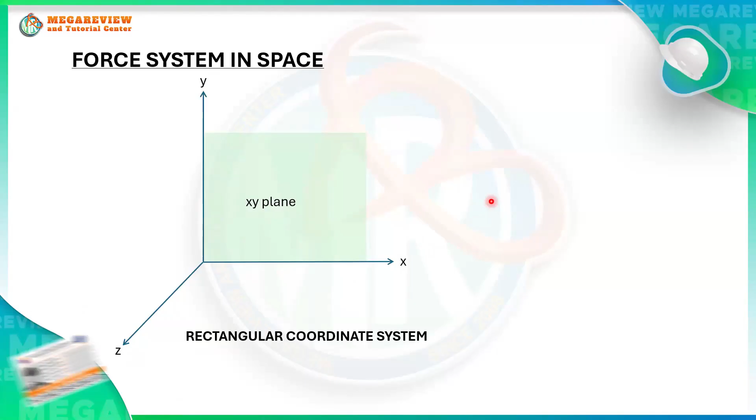Now, these coordinate axes form coordinate planes. The green plane, that's your xy plane. This one in blue, that's our xz plane. And this one, that's our yz plane. So these are the coordinate planes.

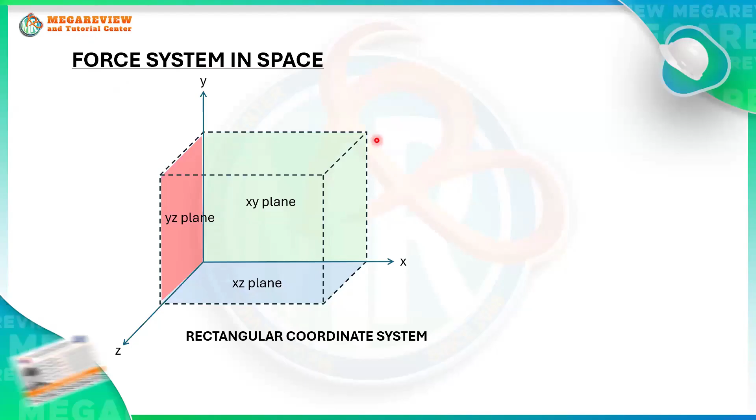So to get the x component, what we'll do is simply use ratio and proportion. So your x component is to F as x distance is to the inclined distance d. From this equation, we can get the x component of our force.

If we get the y component, it's still ratio and proportion. The ratio of y to the total force equals the ratio of y distance to the total distance or inclined distance. That's why your Fy is equal to y over d times F.

Now you may see the pattern here. If this is x, what's in the numerator is the x distance. If it's y, what's in the numerator is the y distance.

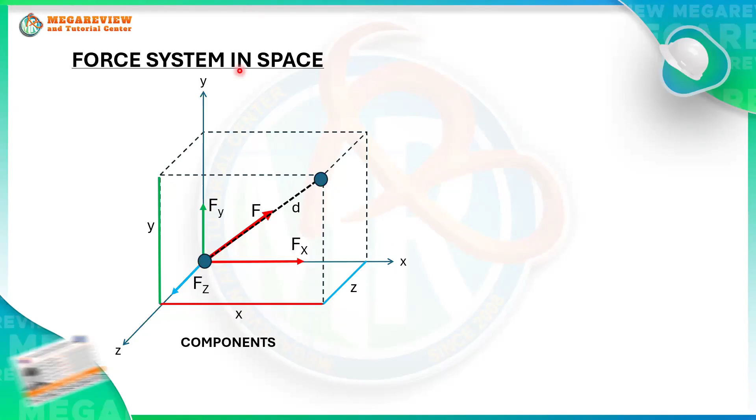Okay, itong d na to, pwede mong isipin na parang space diagonal lang siya ng ating prism. Di ba? Space diagonal lang siya ng prism na to. And to get this, paano ba kayo kumukuha ng space diagonal ng rectangular prism or let's say cube? Di ba equal lang yan to square root of three times the length ng side? Or kung dito, ilalagay natin yung x, y, and z, your d here is equal lang to square root of x squared plus y squared plus z squared. Galing lang din ito sa Pythagorean theorem. Okay, so that's how you get your d distance. Kailangan mo lang yung x, y, at saka z.

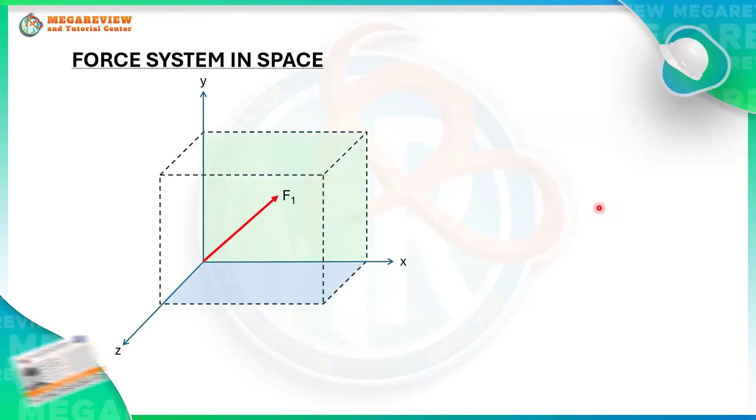Okay, ngayon, paano guys kapag hindi lang isang force ang nag-act sa isang body or rigid body. Let's say may F1 ka, F2 at saka F3. So from your previous discussion sa statics, sa 2D, kapag may mga series or may mga forces na nag-act on a certain body, you can express this in terms of equivalent single force, di ba? And that equivalent single force is your resultant. And how can we get this resultant? Well, basically, resultant is equal lang to the sum of the forces. And this resultant is also a vector quantity.

So that's why meron din itong components, at saka magnitude and direction. So if you want to get the x component of the resultant, we will simply sum up the x component of the forces. Yung y component naman ng resultant equal lang to the sum of the y component ng forces. And yung z component naman natin equal lang to the sum of the z component ng ating mga forces. Okay, so that's how you get your resultant, kung ang force natin is concurrent. Or kahit non-concurrent, ganito pa rin naman ang gagawin natin. O ngayon, paano guys kapag halimbawa nag-zero yung ating resultant?

Okay na ba? Ano yan? Naririnig na ako? Naririnig na ako? Thumbs up nga guys if okay na yung audio ko. Hello? Hindi pa rin? Wait, wait. Okay na, okay na. Sige, thank you. Okay, thank you. Sige, balik tayo dito.

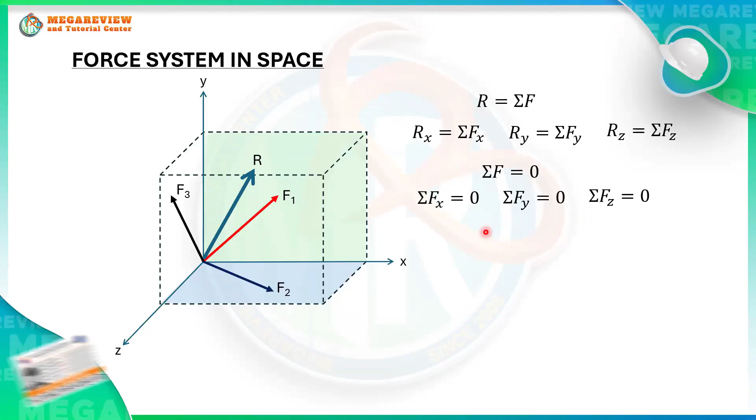Okay. So, when the resultant is equal to zero, ibig sabihin nasa state of equilibrium yung ating particle or yung ating body. So, ang magiging components natin dyan will be zero din. That's why, if kukunin natin yung summation of forces along X, along Y, and along Z, equal din yan to zero. And these equations, yan na guys yung ating equations for equilibrium ng concurrent force system. So, simple lang naman ang concept dito sa 3D. Importante lang dito, alam nyo paano kumuha ng components ng force at saka alam mo paano mag-sum up ng forces and also mag-sum up ng moments.

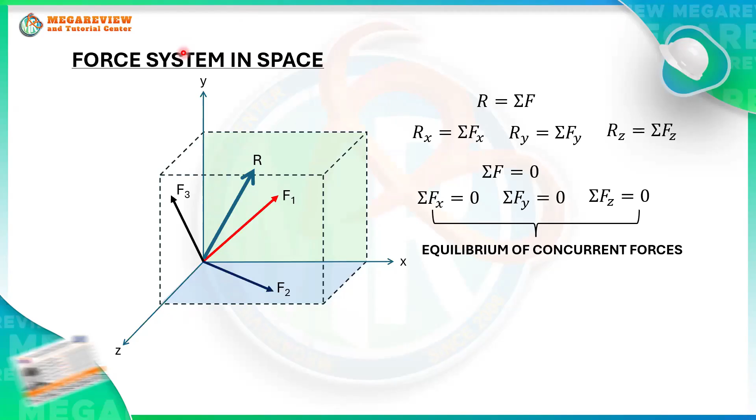Okay, so I think with that, pwede na tayo guys mag-proceed dun sa ating mga problems. Okay, so sige, wait lang. I will just transfer the screen sa tablet. So, nandito kasi yung mga problem ko. Okay. Sige, yan, okay na. Nakita naman sa screen yung problem, no?

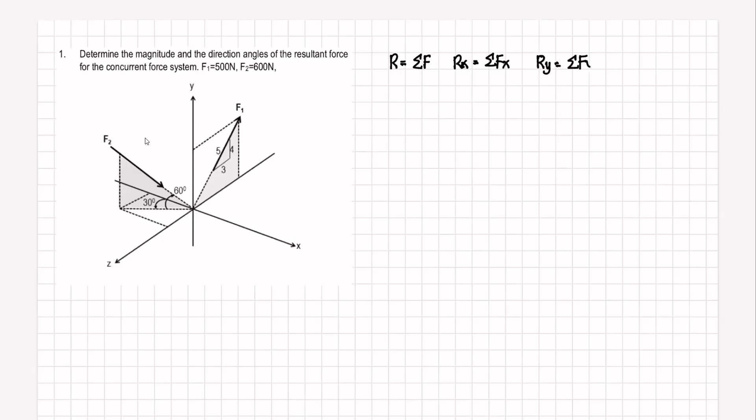Okay, so for our first problem, sabi dito, we have to determine the magnitude and direction of the resultant for the concurrent force system. So we are given here F1 equals to 500 newtons and F2 equals to 600 newtons. Okay, so to get the resultant, this is equal lang to summation of forces, and kung gusto natin makuha yung components ng resultant, kailangan lang natin i-sum up yung component din ng mga forces. So for Rx, equal lang ito to summation of forces along X. For Ry naman, this is summation of forces along Y, and meron din tayong Rz equal lang to summation of forces along Z.

Now, para di tayo mahirapan mag-imagine sa mga forces na nakalagay sa space or sa 3 dimension, i-project na lang natin ito to 2D. Okay, isa-isa nating kunin yung components ng mga force na to. Okay, for our F1, kung titingnan natin yung location ng ating F1, actually nasa coordinate plane ito. Ang F1 natin actually located siya dito sa XY, hindi pala sa XY plane. Nandito siya sa YZ plane. So this is your Y axis, ito naman yung ating Z axis. So ito guys yung ating F1. Okay, ngayon kung yung F1 natin is nasa YZ plane, anong component ba ang mazizero diyan?

Wala tayong projection ng F1 towards the x-axis. Ang projection natin dyan is nasa Y and Z lang. Sige, i-project natin ito sa YZ plane. Drawing natin dito yung ating Y-axis, tapos ito naman yung ating Z-axis. So this is our F1.

Itong F1 na to may given na slope: 3 along Z, 4 along Y, and 5 ito. So itong F1 na to, pag i-project natin towards this axis, makikita natin itong ating Z component, this is your F1Z. Pag i-project naman natin siya dito sa Y axis, ito naman yung ating F1Y.

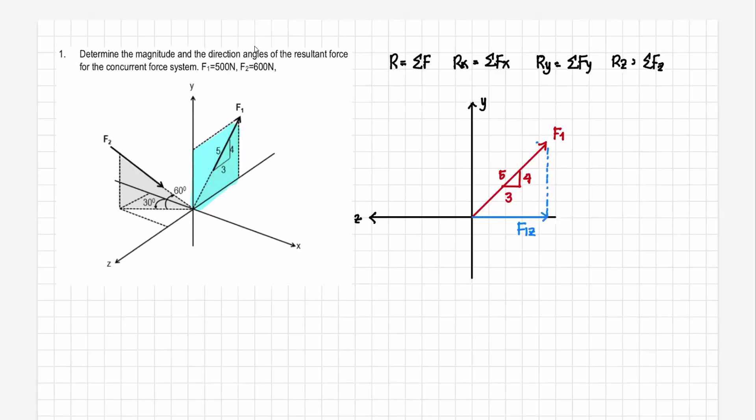Ngayon, kunin natin ang value nito. Para sa F1Y, pwede lang tayo dito mag-ratio in proportion. Pwede natin sabihin this is equal to 4/5 of F1, gamit yung slope na to. Knowing na yung F1 natin, this is equal to 500 newtons. So what is the value ng F1y? Your F1y, this is equal to 400 newtons, di ba?

Ngayon, punta naman tayo sa F1z. Para makuha natin ang value ng F1z, ang distance natin along Z, we have 3. Along the incline naman, we have 5. So pwede natin sabihin, your F1z is equal to 3/5 times your F1. Palitan mo na lang ito by 500 newtons. Your F1z naman is equal to 300 newtons.

Alright, ngayon, since meron na tayo ditong value ng F1z, pwede na natin isulat yung F1 in vector form. So let's say this is your F1. Ang ating X component dito, this is 0. Yung Y component naman natin, we have 400 newtons. Tapos yung F1z naman natin, we have 300 newtons.

By the way, may sign din dapat ang component natin. Kapag ang ating force is nag-act towards the positive x-axis, positive ang ating component. Kung nag-act naman towards the positive y, positive naman yung ating component. Kung titingnan nyo dito, ang convention natin, kung saan nakalagay ang letter, andoon yung ating positive axis.

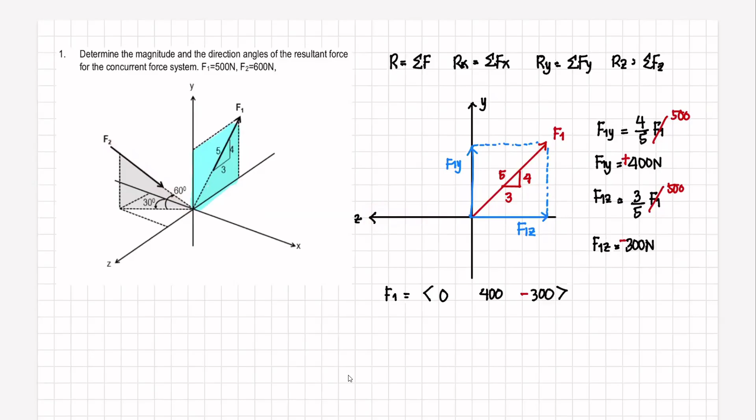Alright, ngayon punta naman tayo sa F2. Ang F2 naman natin, ito naman ang kanyang direksyon. Wala siya sa coordinate planes. Baka isipin nyo nasa YZ plane, hindi sa YZ plane yan. Ang YZ plane natin, ito lang na nasa F1. Itong F1 lang. So ang F2 natin, ito siya, ha? At ang plane kung saan siya nag-act, ito yon. Hindi ito coordinate plane.

Ngayon, itong F2 na to, pwede natin siya i-project parallel to Y. Itong projection natin parallel to Y, ito yung ating Y component F2Y, and pwede rin natin siya i-project parallel to this plane. Itong plane naman na to, this is actually your XZ plane. Ito yung x-axis, ito yung z-axis. Itong plane na to, this is actually your XZ plane. Itong red arrow na to, tawagin na lang natin itong F2 or projection ng F2 to the XZ plane.

Ngayon, try natin na i-isolate yung triangle na yan. So this is your F2, ito naman yung ating F2Y, and this is the projection ng F2 to the XZ plane. This angle, given na to, this angle is given as 60 degrees. At from this triangle, we can get this F2Y.

Pwede natin makuha yung F2Y na to. Your F2Y, pwede natin sabihin equal lang ito to. May value ka naman ng F2, ito ang kukunin natin. Kung i-relate mo ito at saka ito, gamit tayo ng sine function. So your F2Y, this is equal to F2 times sine of 60 degrees. May given naman na F2, this one is 600 newtons. Ano ba ang value nito na F2Y? Sige nga, pakibigay ng sagot.

So let's say this is your x-axis, tapos ito naman yung ating z-axis. Parang ang point of view natin dito is nasa taas. Ayan yung x, ito naman yung z. Tapos ang F2XZ natin, ang direction niya, papunta sa positive x, pero papunta sa negative z. Kumbaga dito, ito yung ating F2XZ.

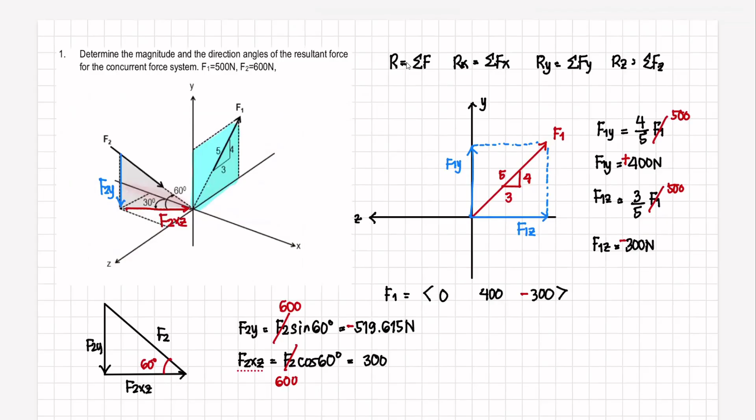Tapos itong angle na to, from the positive x, given na rin to, this is equal naman to 30 degrees. Galing dito, papunta dito, 30 degrees yan. Okay, ngayon pag project natin ito, may kita na natin yung component ng F2. Eto guys, this is now the component ng F2 along x. Tapos pag i-project naman natin dito, eto naman yung component ng ating F2 along z. Okay, and to get these components, gamit na lang tayo ng basic trigonometric function.

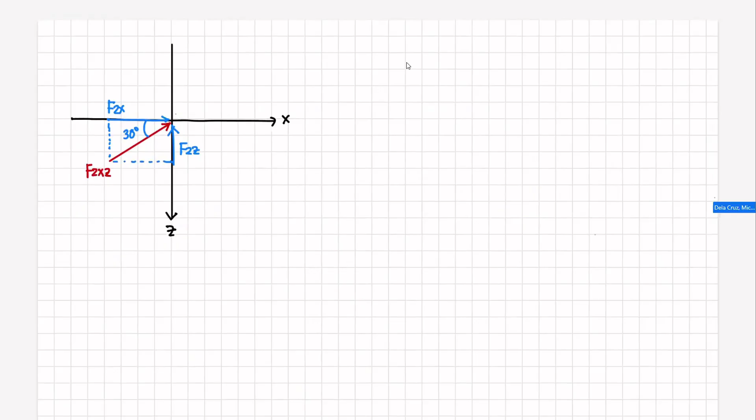Okay, so for our F2x, this is equal lang to F2xz, multiply ka ng cosine of 30 degrees. Okay, this one is 300 newtons. And ano ba ang resulting value natin dito for our F2x? This one is 259.808 newtons. Okay, and ang sign naman natin dito, as you can see, your F2x is directed towards the positive x-axis. Therefore, this is positive 259.808.

Now, for our z component naman ng F2, this is equal lang to the projection ng F2 to the xz plane, then multiply naman tayo, opposite yan dito sa angle na to, kaya gamit tayo ng sine function. So, this is 300 sine of 30. This one is equal naman to 150 newtons.

Okay, and take a look at the direction of F2 along Z. This is our positive Z-axis. Ito naman yung ating Z component ng F2, so towards the opposite side na ng positive axis. Kaya ito naman nilagay natin as negative F2. Okay, so since dito, kuha na natin guys yung component ng ating mga forces.

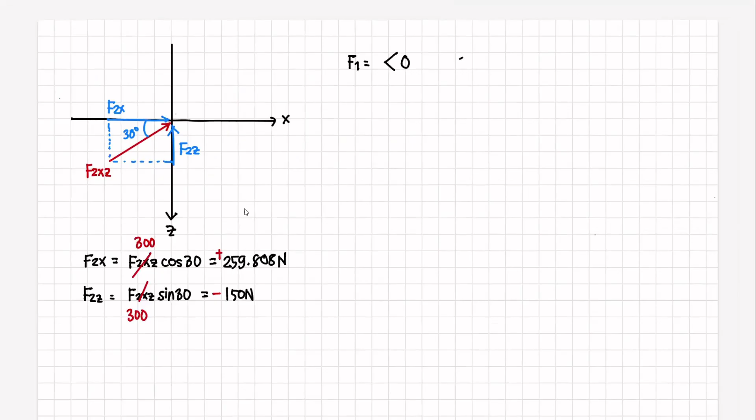So finally, we can now get the resultant of this given na two forces. Isulat ko na lang dito yung ating F1. Yung mga nakuha natin kanina, this is 0, 400, and negative 300. This is your X component, Y component, and Z component ng force.

Okay, ngayon for our F2, ito naman ang mga nakuha natin na value. We have positive 259.808. Your Y is negative, ito yung Y natin, we have negative 519.615. And for our Z component naman, we have negative 150 newtons. Okay, so ito na guys yung ating mga components.

And now, to get the resultant, we will simply sum up these forces, isum up na lang din natin yung mga components. Okay, so for our X component, 0 naman yung F1X, kaya ang matitira is 259.808. So for our Fy naman, this is negative 119.615, and dito naman sa ating Z component, this is negative 450 newtons. Okay, this value is now our X component ng resultant, this is your Y, and this is your Z component.

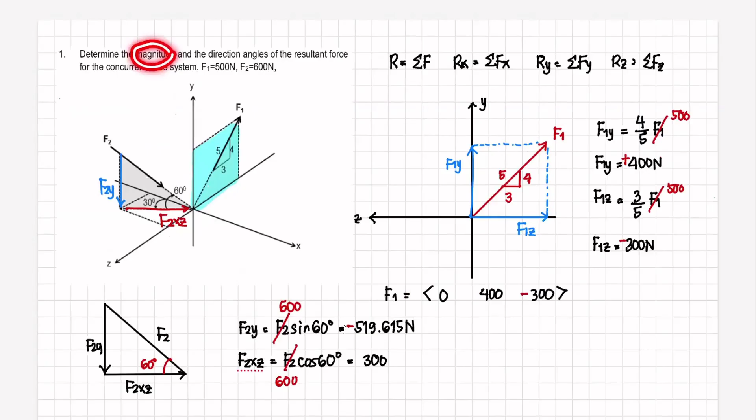Okay, and using these values, we can now get the magnitude of the resultant. Ayan, magnitude. So to get the magnitude, gamit lang tayo ng Pythagorean theorem dito. So the magnitude of the resultant, this is simply equal lang to square root of x component squared plus y component squared plus z component squared.

Sige guys, patulong na lang ako.

So tama ba to? 533.205. Pa-confirm na lang dun sa iba. Okay, so 533.205 newtons. So yan na guys yung ating magnitude ng resultant.

Okay, so how about the direction or direction angles? Okay, so to get naman the direction angles, balik lang tayo sa 2D. So halimbawa, this is your X and Y axis. Tapos ito naman yung ating resultant.

Okay, ito guys, this is your X component ng resultant. And itong angle na to, this is actually your direction angle theta X. Tapos pag i-project naman natin dito, makikita natin yung RY. Ito naman guys is your theta Y.

Okay, using this figure, so we can get the value of this theta X and theta Y using cosine function. Okay, so halimbawa, ito. So pwede natin gamitin itong X component and itong resultant na to. So your cosine of theta or theta X, this is equal lang to Rx divided by the magnitude ng resultant. Kung kukunin naman natin yung cosine of theta Y, so pag gagamitin naman natin na side dyan will be itong Ry at saka ito.

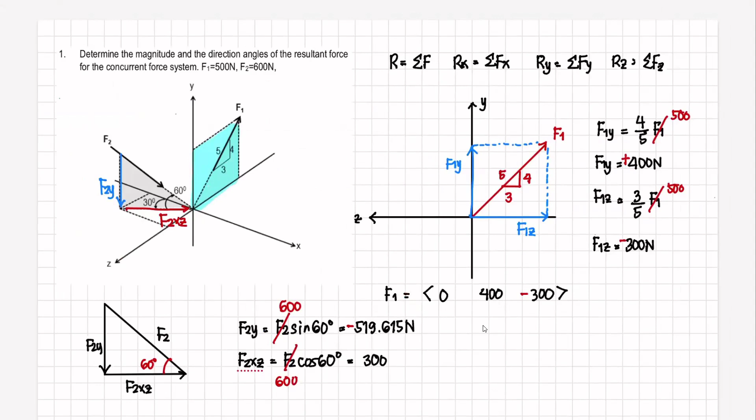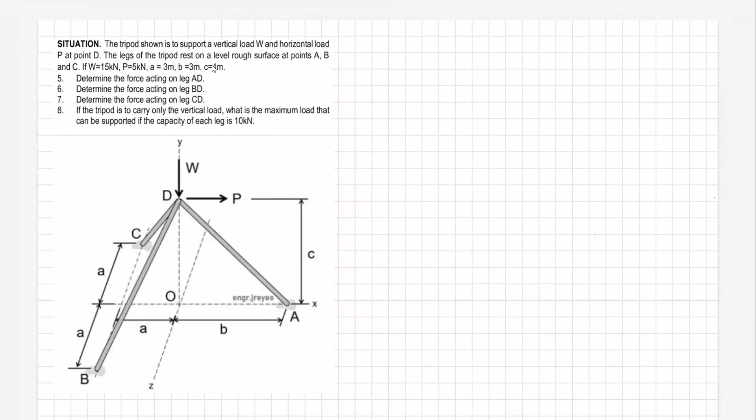Okay, so this is a past board exam problem. We are given a tripod supporting a vertical load W and a horizontal load P at point D. The legs of the tripod rest on a level rough surface at points A, B, and C.

So W is 15 kilonewton, P is 5 kilonewton, and these are the given distances. Your A is 3 meters. This is 3, and this is also 3. Then the value of B and C is 3 and 4 meters respectively. So we have to get the force acting on leg AD, leg BD, and leg CD. This is leg AD, this is leg BD, and this is leg CD.

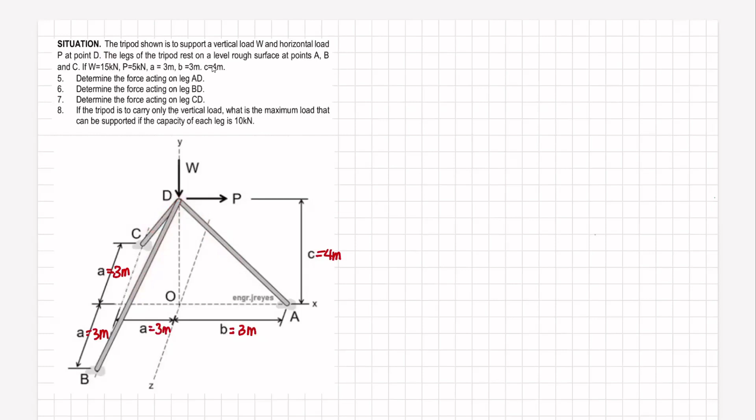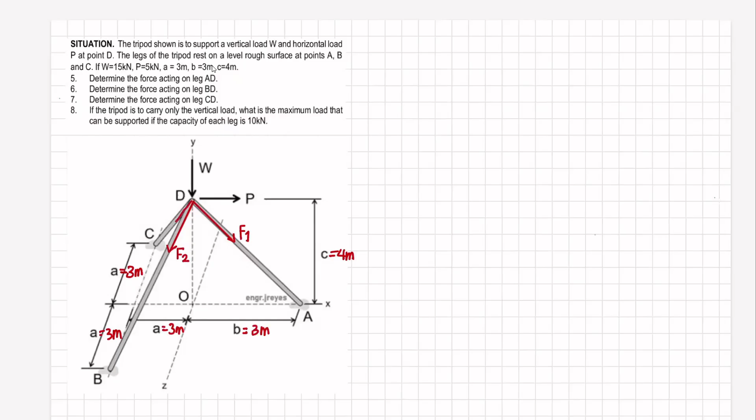Okay, let's assign forces to each leg of our tripod. Let's say the force here at leg AD, this is your F1. The force at leg BD, this is your F2. And the force at leg CD, let's call this F3. Now we'll assume that these forces are acting in tension. If it turns out negative, then our assumption is wrong, meaning the members are subjected to compression. So that's our F1, F2, and F3.

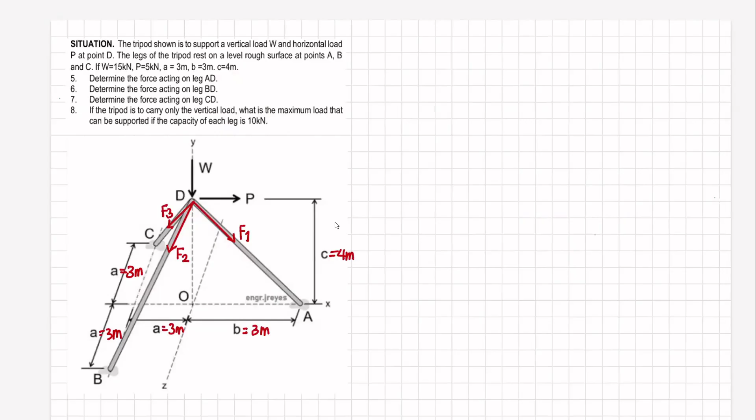Next, let's assign coordinates to the important points, or where the line of action of our forces will hit. At point D, what is our coordinate? This is your X, this is Y, this is Z, so our vertical axis is the y-axis. This point is located on the y-axis, so our x and z will be 0. So we have 0, 4, and 0.

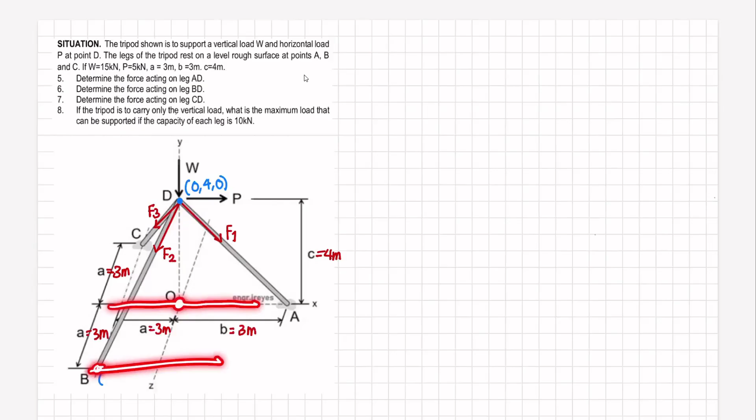Now what is the coordinate at point B? The point B is at the same level as O, so they're on the same plane, the XZ plane, which means our y coordinate there will be 0. For the value of x, we have -3, y is 0, and for z, this distance is towards the positive z-axis, so this is positive 3. That's the coordinate of point B.

Now for point A, the coordinate is located on the x-axis, so this is 3, y is 0, z is 0. For point C, we have -3, y is 0, and z is towards the negative z-axis, so this will be -3. So we have -3, 0, -3.

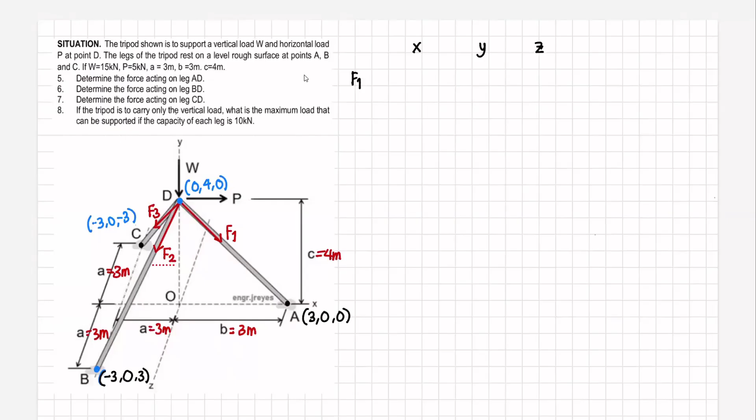Okay, now let's fill in the distances in the table. For F1, what is our x distance? It's head minus tail. This is the head, this is the tail, so you get the difference of the coordinates of the tail and the head, those are our distances. For x, we have 3 minus 0, which is 3. 0 minus 4, which is -4. For z, we have 0 minus 0, which is 0.

That makes sense since member AD is on the xy plane, here's y, here's x, so there's no z component or z coordinate there, so the z distance is 0. Now for the value of d, it's the square root of x squared plus y squared plus z squared, store that in letter A of your calculator. I hope you're following. That gives 5, correct, 5. Practice storing these values.

Now let's go to F2. For the distance of F2 along X, again just look at the coordinates of the head and the tail, the difference gives our distances. For X, we have -3. For Y, we have 0 minus 4, which is -4. For Z, we have 3 minus 0, which is 3. Now store the distance D in letter B.

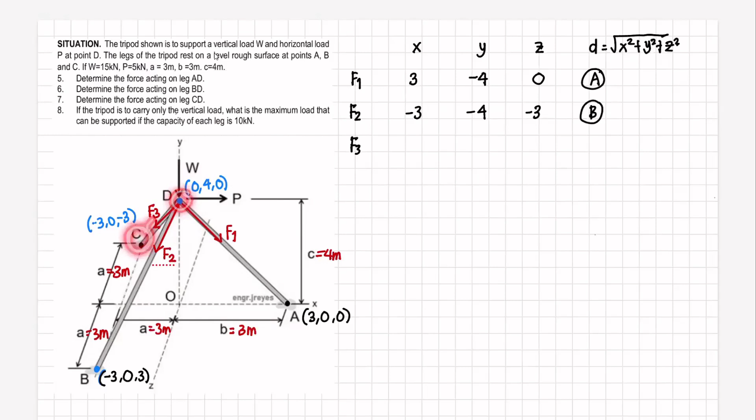So ang distances natin for F3, pwede natin makuha by simply subtracting the location, ito yung magiging head natin, ito naman yung tail. For X, negative 3 minus 0, this is negative 3. For Y, 0 minus 4, this is negative 4. And for Z, negative 3 minus 0, this is negative 3.

Okay, tapos yung distance D, store nyo lang guys sa letter C. Positive po, positive po sa 3 sa Z. Tama, itong F2, sorry, this should be positive. Okay, tama, tama, ayan no? 3 minus 0, tama, this is positive. Okay, so yan na yung ating mga distances, no?

Ngayon, to solve for the three unknowns, gagawa lang tayo ng tatlong equations, guys, no? Okay, our equation 1, form natin by summing up the forces along X. So this will be equal lang to F1x plus F2x plus F3x plus P, and this will be equal lang to 0.

Okay, and remember, the x component is ano lang to? Ratio lang ng x at saka ng d distance times the magnitude ng force. So kaya for F1x, ang ilalagay natin dito will be equal lang to 3 over A times F1. Tapos yung F2x naman natin, this will be negative 3 over B times F2. Then for F3 naman, we have negative 3 over C times F3, and this is equal to negative 5.

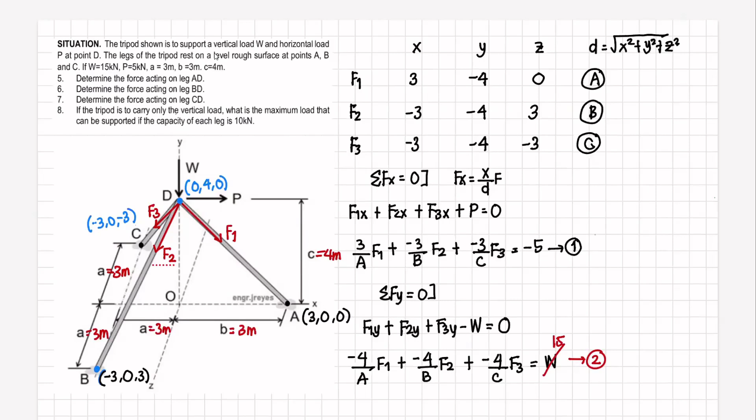Ayan, so may dalawang equation na tayo. So isa na lang ang kulang natin. And pwede naman natin ma-form yan by summing up the forces along the z-axis. Okay, dito na lang sa next page. Okay, so sige, let us sum up naman the Z component ng forces. Okay, so wala namang external load na nag-act on the Z-axis ha. Ayan, so kaya dito ang ilalagay natin are the components lang ng F1, F2, and F3.

Alright? So this is equal lang to Z1, ayan, this is 0 over A times F1. Then dito naman we have, for F2, we have 3 over B. Then for F3 naman, we have negative 3 over C times F3. And this will be equal to 0. So eto naman guys yung ating equation 3.

So bakit nag-negative 3 ang Z ulit, sir? Ito, yung sa F3 guys, sa F3 ito. Kasi tingnan nyo ha, negative 3 itong Z coordinate natin sa point na to, then dito naman is 0. So ayan, head minus tail ha, negative 3 minus 0, ayan, negative 3.

Okay, so yan na guys yung ating tatlong equations, ayan. So this is your equation 1, oh, this is your equation 2, ito naman is our equation 3. So to solve for the three unknowns, sige, I hope may calculator kayo dyan ha. Sige, punta na lang kayo guys sa mode 5, 2.

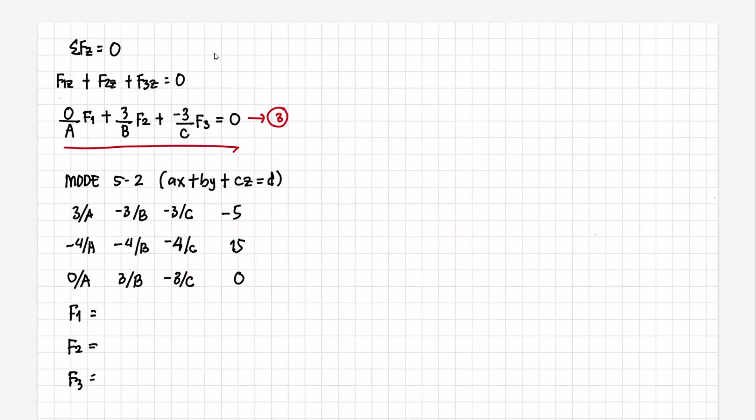Okay sige guys, paki-compute na lang ng F1, F2, and F3. Sa Fx, sir, negative 3. Wait lang, let me check. Negative 3 yan, tapos 0 dito. Yung F1 hindi naman negative 3, positive naman to. Yung F2 at saka F3, yun yung negative yung component.

Okay, so we have negative 13.54. Tapos, ano yung susunod? Negative 3.04. Tama, this is negative 3.04 kilonewton.

Okay, so pag nag-negative guys yung sign dito, ibig sabihin mali yung assumption natin. Inassume kasi natin dito na itong mga legs ng tripod are subjected to tensile force, acting away itong mga force na to from this point. Pero kung i-analyze mo ng maigi, kung andito yung ating W, ika-counteract to nitong mga to in compression. So nag-make sense naman yung sign na to.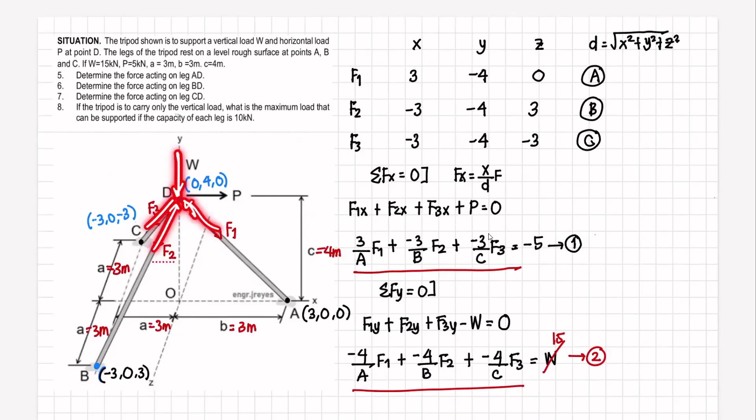So ang sagot natin para sa force in member AD, this is 13.54 kilonewton. Then for member BD naman, 3.04 kilonewton. Then for member CD, pareho, 3.04 kilonewton din. So ayan na guys ang sagot natin for number 5 to number 7. These are now the forces acting on each member of the tripod, or each leg of the tripod.

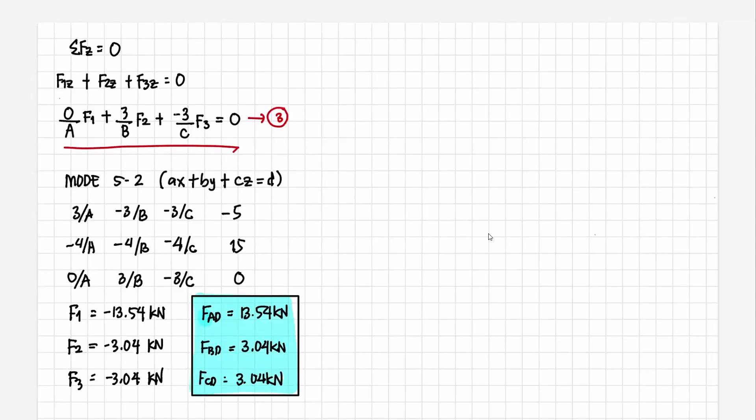O, ngayon, proceed tayo dito sa number 8. So for number 8, sabi dito, if the tripod is to carry only the vertical load, ano daw ang maximum force that can be supported, or maximum load W that can be supported if the capacity of each leg is 10 kilonewton.

So may given naman na capacity sa number 8 and we have to get the maximum load na pwedeng ilagay. Sa number 8, i-ignore na natin itong P, hindi na kasama ito sa ating calculation, so ito na lang na load W. Ngayon, ang components ng ating force, take note guys, nakadepende yan sa geometry ng ating legs. Sa number 8, hindi naman natin babaguhin yung location ng ating mga legs, so itong mga components na to, F1x, F1y, pati itong mga components, hindi nag-change yung value niyan. Pero magbabago pa rin naman pala siya depende dun sa total force na nag-act on each leg.

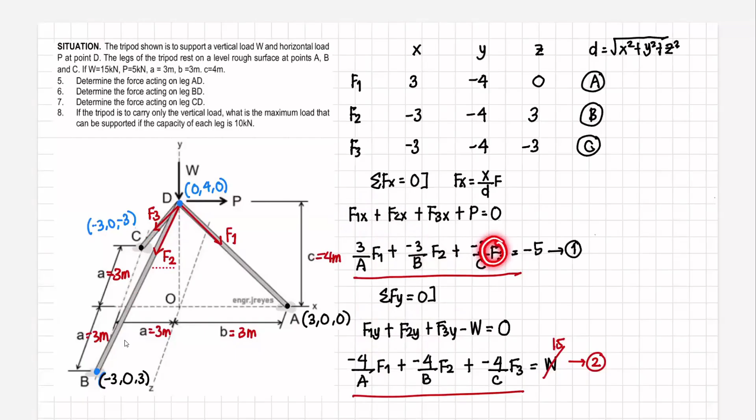Okay, ngayon, so for number 8, ganito na lang gawin natin. I-consider lang naman natin dito na load W ang mag-act, so pwede pa rin natin magamit itong equation na to. Sa totoo lang, ito wala na tong value, so papalitan lang natin ito, gagawin lang natin tong W. Gagamitin pa rin natin itong equation na to. So for number 8, diretso na lang kayo sa mode 5-2. Ito yung mga equations na gagamitin natin.

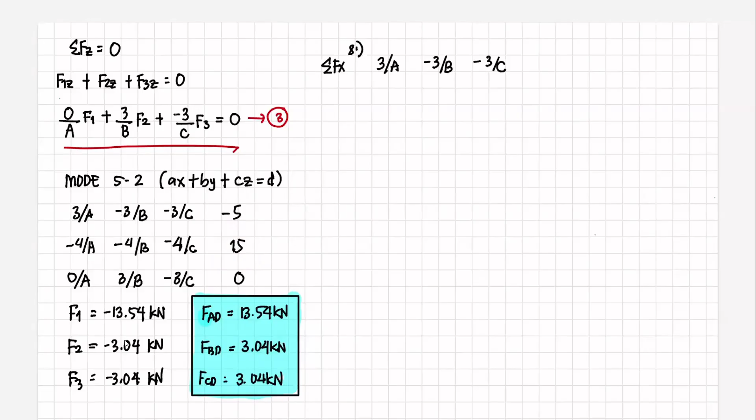Ito yung summation of forces along X. We have 3 over A, negative 3 over B, negative 3 over C. Wala na tayong load along X, kaya this will be 0. Sa summation of forces naman along Y, we have negative 4 over A times F1, plus negative 4 over B times F2, that's your F2Y, tapos F3Y, negative 4 over C, and this will be equal to W. Okay, ito naman yung summation of forces natin along Z. We have 0 over A, 3 over B, and negative 3 over C.

Ang goal natin dito guys ay makuha yung value ng F1, F2, at F3 in terms of the load W. Ang gawin nyo guys dito para makuha nyo yung value ng F1, F2, and F3 in terms of W.

Sa mode 5-2, iset nyo na lang itong value na to as 1. Sige guys, input nyo ulit, or kahit, may na-input naman kayo kanina. I-delete nyo na lang ito, tanggalin nyo na lang, palitan nyo na lang ng 0 at 1.

Pag press mo ng equal, may lalabas dyan na value, and that value will be the force developed on each leg in terms of the applied load W. So sige, pa-compute guys. Ayan, may sagot na kaagad, 0.625.

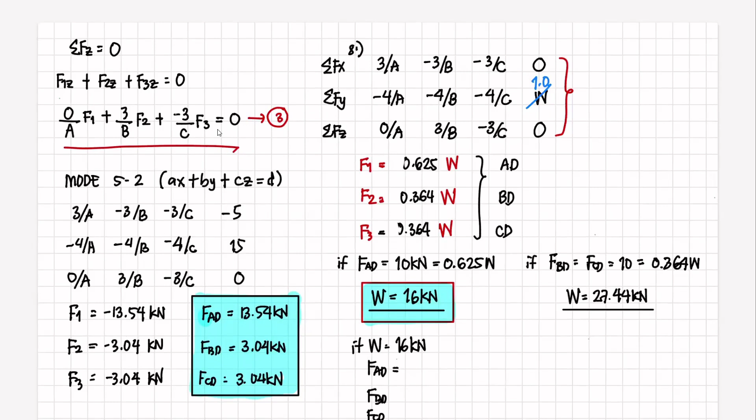Pero kung ang W natin guys is 27.44. Para maintindihan yung sinasabi ko dito: if W is 16 kilonewton, ang force in member AD natin, this is 10 kilonewton. Therefore, safe ang ating member AD.

Ngayon, yung member BD, this is 0.364 of W. Ano ba tong 0.364 of W? 0.364 times 16, ano to? 5.824 lang, di ba? This is less than the 10 kilonewton capacity.

Ganun din yung member CD. So dito guys, safe lahat ng members.

Pero kung halimbawa ito ang ilalagay mo, pag nilagay mo yung 27.44, lagot ka dyan. Tingnan nyo to, if W is 27.44, ang ating member BD at member CD, ang madidevelop dito guys na force is 10 kilonewton, and safe ito sa dalawang members. Pero pagdating sa member AD, this is 0.625 of W. Kung papalitan natin ito ng 27.44, ang mangyayari dito guys, this will be equal to, ano ba, 17.15.

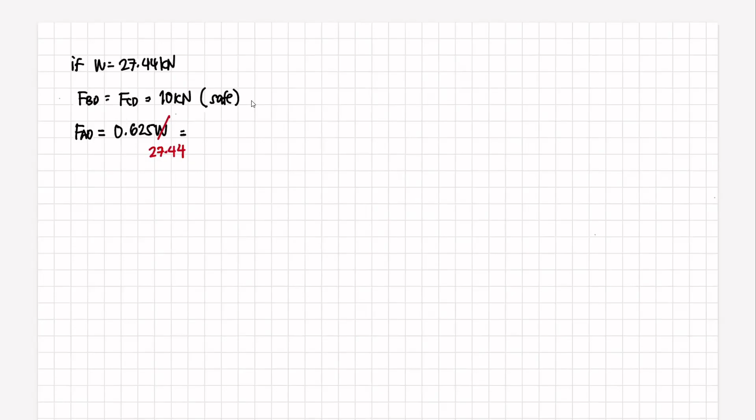And ano ba ang sabi sa problem? Ang capacity ng bawat member is up to 10 kilonewton lang. So ano mangyayari sa member AD guys kung sakali itong nakaload? Panigurado magpe-fail yan, kasi ang madidevelop na actual force is more than the 10 kilonewton capacity. So hindi kakayanin guys ng member AD. Therefore, ang answer natin is 16 kilonewton. Okay, yun lang for number 8.

Sige, question or clarification. Okay, sige, wala. Sige, dito tayo guys sa number 9 naman to number 10.

Okay, so dito naman, we are given three cables AD, CD, and BD that support and suspend a load W at point D. So given yung distances dito, your A is 2 meters, your B is 4 meters, itong C, this is 5 meters. And ang distance E naman natin is equal to 5 meters. So ano daw ang tension in each cable if W is 10 kilonewton?

So for number 10, the maximum load that can be supported if the allowable load on each cable is 12 kilonewton. And for number 11, dito guys, iba-iba yung given na capacity ng bawat cable.

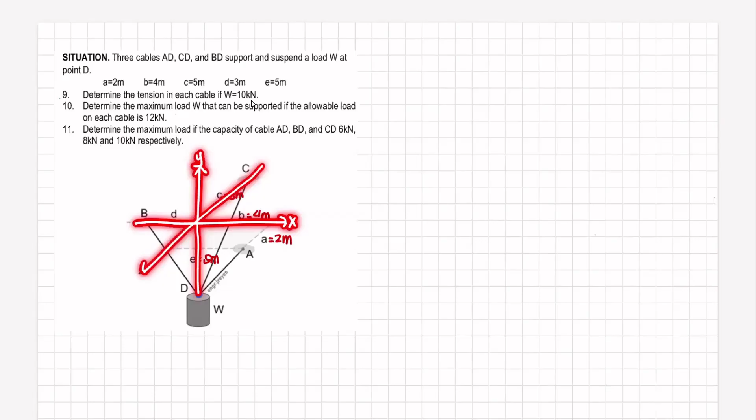Okay, so halimbawa dito sa point D. So by the way, this is our x-axis. Ito naman yung ating y-axis. This is your z-axis. Ito yung x, ito yung y, ito yung z. So at point D, ang coordinate natin dito guys, this is equal lang to, located siya on the y-axis. We have 0, nasa baba ito, kaya we have -5 and 0.

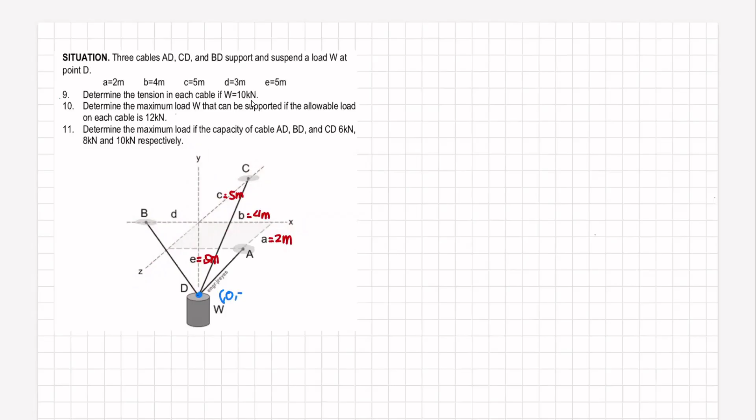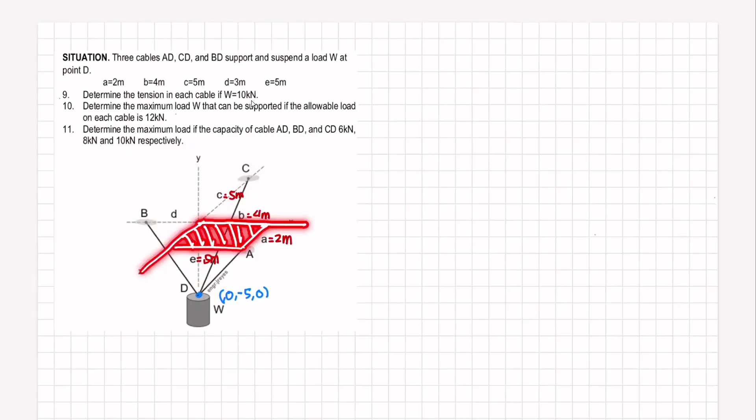Okay, ngayon dito naman tayo sa point A. So at point A, bali ito naman is located on the XZ plane. Ito yung X, ito yung Z, ito yung XZ plane. And nandiyan guys yung point A sa plane na yan. So kaya ang Y natin dito will be 0. Okay, therefore ang coordinate natin, this will be +4, Y is 0, then we have +2. +4, +2, tapos 0 ang Y.

Okay, next. Pagdating naman dito sa point C, ito namang point C is located on the z-axis. Kaya ang x at saka y natin, this will be 0. At ang location naman nito guys is nasa likod ng origin, nasa negative z-axis tayo. So ilagay natin yung z as -5. Okay, and dito naman sa point B, this is located naman on the x-axis. Kaya yung y at saka z naman natin will be 0. And the value of d, by the way, this is 3 meters. Pero nasa negative side tayo ng x-axis, ilalagay natin dito will be -3.

Okay, next, ilagay naman natin yung mga forces na mag-act dito. Unang-una, meron tayong load W. At itong mga cables na to, i-resist niyan itong load W. So let's say this is your T1, ito naman yung T sub 2, at ito naman yung ating T sub 3. So bali itong mga points na to guys, ito yung magiging head ng ating vector. Dito naman manggagaling, or dito naman yung ating tail.

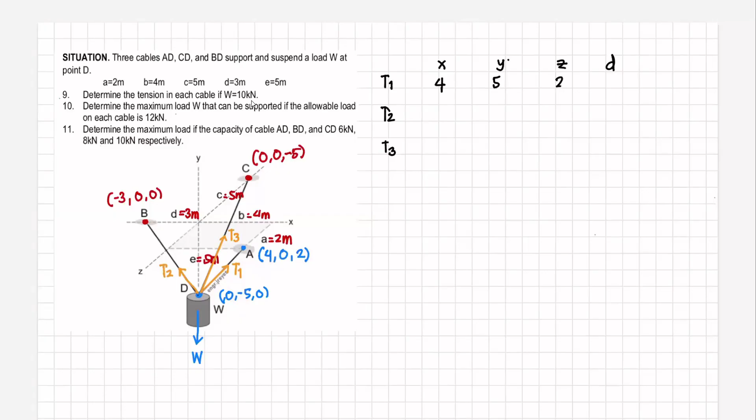Okay, so ngayon, ang gawin natin, i-table na lang ulit natin yung mga distances, para madaling makagawa ng equation. Dito yung x, ito yung y, ito yung z, at saka ito yung d. Okay, so for T1, for our x, head minus tail lang. Ito yung head, ito yung tail. So this is 4. Ang your y is negative 5. Okay, 0 minus -5, so this is +5. So for z naman, this is 2 minus 0, kaya this is 2. Okay, ngayon yung distance dito, store nyo na lang guys sa letter A, yung square root of x squared, y squared, and z squared.

Okay, next. For t sub 2. Okay lang, mabilisan na tayo.

Ano po difference ng E at saka B? Walang difference. Anong tinutukoy mo na difference, engineer? O, E minus B, edi 1. Ay, hindi, joke lang. Ang E guys, ito yan ha. Ang E is itong distance along the y-axis. Yung B, ito naman is along the x-axis.

Okay, proceed tayo dito sa T2. So for our x, we have -3 minus 0, this is -3. Yung y natin is 0 minus -5, so this is +5. And yung z naman natin, this will be 0. Tama naman kasi nasa xy plane itong cable na to.

Okay, ngayon for our T3, so our x distance naman, this will be 0. Yung ating y naman, this will be +5. And yung z naman natin, we have -5 minus 0, so we have here -5. So by the way, yung mga distance D, store nyo na lang guys sa letter B at saka letter C. Okay, so yan na yung x distance.

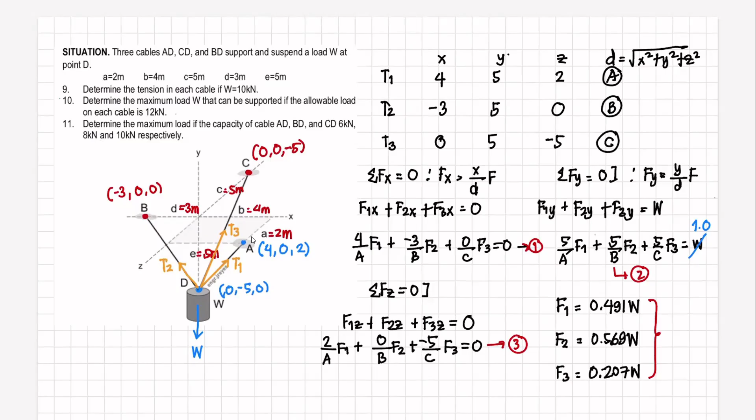Okay, ngayon for number 9, pwede na natin makuha yung tension. Substitute na lang natin yung given na W. Okay, so we have 10 kilonewton.

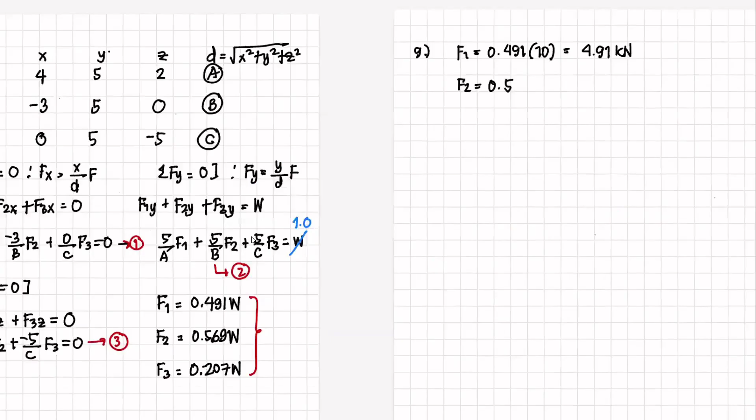So for the force in member AD, this is equal lang to, sige, lagyan lang natin F1, F2, and F3. Okay, so for F1, this is 0.491 times 10, or this is equal lang to 4.91 kilonewton. Okay, for our F2, 0.569 of W or 10 kilonewton, dito naman we have 5.69 kilonewton. At for F3 we have 0.207 of W or this is 2.07 kilonewton. So ito na mga answers natin for number 9.

Okay, ngayon for number 10, sabi naman dito, ano daw ang maximum load W that can be supported if the allowable load on each cable is 12 kilonewtons. So kung anong ginawa natin kanina guys sa pagkuha ng W, based on the capacity, same lang ang approach dito. So kailangan lang natin i-test yung lahat ng members.

So kung i-maximize natin yung F1, 'di ba, this is 0.491 of W. Okay, kung itong F1 na to guys is equal to 12 kilonewton, o ano yung load na pwede nating ilagay? Ano ba yung W natin?

O, this is equal to ano to? 24.45? Okay, this is 24.45 kilonewton.

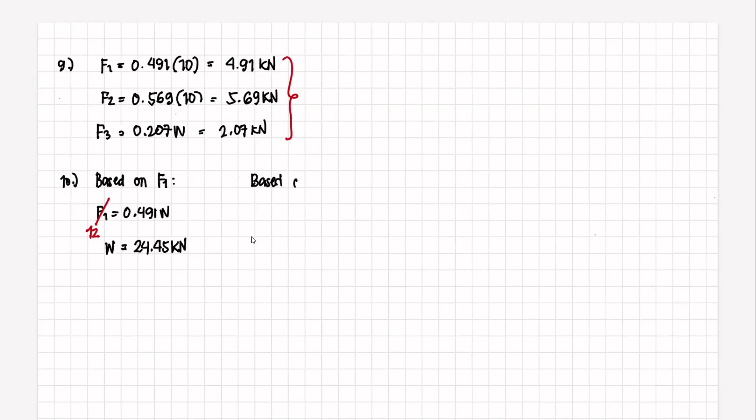O, kung base naman sa F2, your F2 is equal to 0.569 of W. So kung 12 kilonewton ito, the maximum load na pwede nating ilagay is equal to

21.09 kilonewton, no? And lastly, for our F3, your F3 is 0.207 of W. Okay, kung ito guys is 12 kilonewton, okay, your W here will be equal lang to 57.98 kilonewton. So ano bang napansin nyo dito guys?

So ang nag-go-govern na load W is itong 21.09, di ba? Ito yung pinakamaliit. Okay, or bottom line, pag halimbawa guys, pare-parehas ang capacity ng cable, bali ang load W na pwede mong ilagay doon will be based dun sa cable na magkikerry ng pinakamalaking force. Okay? So kung magde-design ka ng load, i-design mo siya guys dun sa pinaka-critical na cable.

No, ang pinaka-critical diyan of course, yung magkikerry ng pinakamalaking load, 'di ba? Ito 'yon. So isipin nyo, of almost 57% ng load, si F2 lang ang magkikerry. Kumbaga siya ang unang mag-fail diyan kung sakali guys maglagay tayo ng load, no? Kaya dapat diyan tayo magbase. So our answer is ito na, no, 21.09 kilonewton.

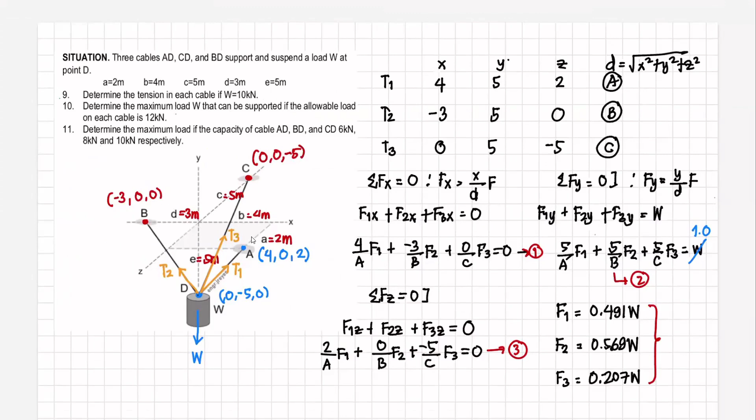Okay, ngayon for number 11, dito guys magkakaiba yung capacity ng cable, di ba? So ang capacity ng cable AD, we have 6 kilonewton. So ang capacity naman ng cable BD is 8 kilonewton and capacity naman ng cable CD is 12 or 10 kilonewton.

O sa case na to, di natin masasabi kaagad guys na yung design ng load ay magbabase dun sa may pinakamalaking, or dun sa cable na magkikerry ng pinakamalaking load. So ito kailangan talaga natin i-test isa-isa, no, yung bawat cable.

Okay, ngayon ang madaling approach dito guys is ano na lang, mag-ratio and proportion na lang tayo. Okay? So di ba kanina, nung ang capacity natin is 12 kilonewton, di ba? Ang ating nakuha na load is 24.45. Ngayon kung 6 kilonewton, ito naman yung ating load W.

So pwede tayong mag-ratio and proportion na lang dito, no? So ito yung maximum load if 12 yung ating capacity. So kung 6 kilonewton, edi ayan yung ating W. Or ito, mahati lang ito, di ba? This will be equal lang to 12.225 kilonewton. Okay, so yan yung ating W based on AD.

Pero we are not yet done. So kailangan din natin i-check yung other members or other cables pa. So for member BD, kung 12 kilonewton yung ating capacity, ito naman yung ating maximum load W. O ngayon, kung 8 kilonewton ito, ano naman yung W na pwede nating ilagay?

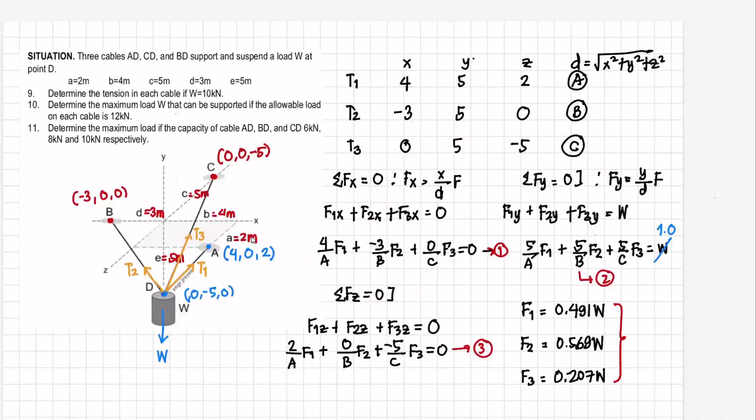So we have to check pa yung member CD. So for member CD, ito ang ating capacity. So kung kanina guys, no, 12 ang ating capacity, ang maximum load na pwedeng i-carry is 57.98. So ngayon naman natin, 10 kilonewton na lang. So ano naman ang W natin? This is equal naman to 48.31 kilonewton.

Okay, and from these values, pwede na natin mag-determine yung maximum safe load dyan. And obviously, our maximum load will be yung pinakamaliit na value. So our answer naman for number 11 is itong 12.225.

Okay, ayan, pwede tayo mag-ratio and proportion dito, or pwede rin naman yung katulad ng ginawa natin dito, edi ilagay mo yung 6 dito guys. Yan, nakuha mo yung W. O dito naman, ilagay mo yung 8, makukuha mo rin yung W. O dito naman, ilagay mo yung 10, then you can get the value of W. So pwede rin naman na ganun. Okay, so ito, ayan, nag-introduce lang ako sa inyo ng ibang method, para kung sakali guys na iba-ibahin yung W, pwede kayong mag-ano na lang. Pwede nyo lang gawin yung ganito, ratio and proportion. Okay? So yun lang no for this situation.

O any question or clarification sa solution natin? Ang daming mabilis mag-solve, ayan, okay yan.

Yan. O, dapat hanggang board exam yan, para po mabilis matulog. Grabe naman. Okay lang, nako, itong oras na to talagang siesta time to. Pero sige, laban guys.

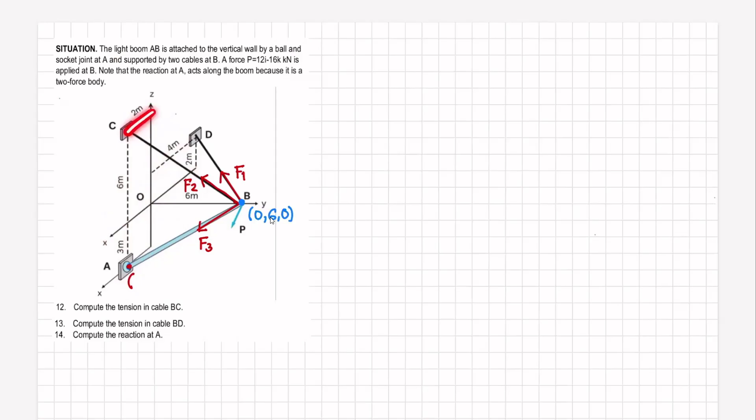Ngayon, for point A, ang point A naman natin, this is located on the xz plane. Di ba ito yung x-axis? Ito yung z-axis? This is the xz plane. O nandiyan mismo yung point A. Okay, so bali ang ating y dito will be 0. So for x, ayan, we have positive 2. Your y is 0. Then yung z naman natin, we have negative 3.

Okay, so dito naman sa point C. Ito naman we have positive 2, 0 ang y, then positive 6 naman ang ating z. Okay, and dito naman we have negative 4 yung x. Y naman natin is 0, then we have positive 2. So yan na guys yung ating coordinates.

Ngayon, i-table ulit natin yung mga distances na yan. Okay, ito yung F1, ito yung F2, ito naman yung F3. Okay, dito yung X, dito yung Y, dito yung Z, ito yung D. Okay, and ito guys, itong X at saka itong X, Y, and Z, para makuha natin head minus tail lang ito.

Okay, for our F1, ang direction ng F1 is from B to D. Okay? So dito yung head, ito yung head, ito yung tail. So head minus tail, we can get the X, Y, and Z distance. So we have here negative 4, this is negative 6, positive 2.

Okay, tapos yung di na makukuha nyo guys, store nyo na lang sa A. Yung distance, siya na rin yung length? Oh, yan yung length ng member guys. Halimbawa dito sa video, yung di na yan, ito mismong length niya.

Okay, ngayon punta tayo sa F2. So for the difference naman ng ating mga coordinates or the distances, we have positive 2, your y is negative 6. And your z naman is positive 6. So ito naman, i-store natin sa B, itong D. Ayan, itong square root of x squared, y squared, and z squared.

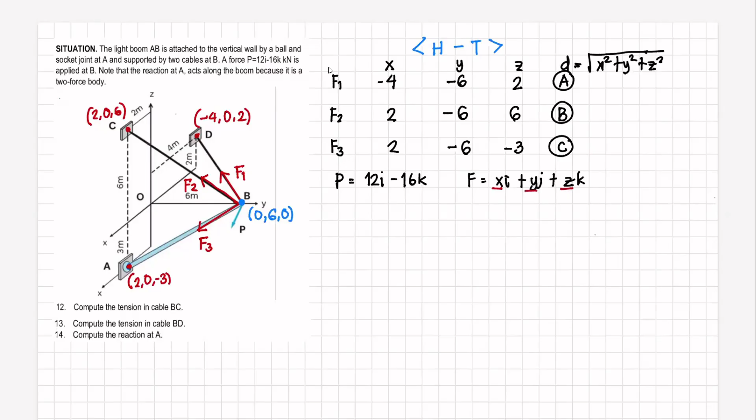Okay, so may given dito guys na force P, which is equal to 12I minus 16K. So di ba pag mayroon kang vector, ang format natin dyan is ganito, xi plus yj plus zk. Wherein, itong mga coefficients ng x, y, and z, yan yung ating components ng force. Okay, bali dito, kung kukunin pala natin yung x component ng ating force P, equal lang ito to positive 12.

So yung ating y component naman, since wala tayong j dito, edi this is 0. And ang ating z component naman, this is negative 16. Okay, so with this value, pwede na tayo mag-sum up ulit ng mga forces.

Okay, so for the summation of forces along x, this is equal to 0. We have F1x plus F2x plus F3x, and this is minus or plus Px, equal to 0. So we have negative 4 over A times F1, then 2 over B times F2, then 2 over C times F3, then yung Px natin is positive 12. So this will be now our equation 1.

Okay, ngayon for our equation 2, sum up naman natin yung y component ng forces. So we have F1y plus F2y plus F3y. Then wala naman tayong Py, kaya this will be equal to 0. So we have negative 6 over A times F1 plus negative 6 over B times F2, then negative 6 over C times F3, and this will be equal to 0. Ito naman yung ating equation 2.